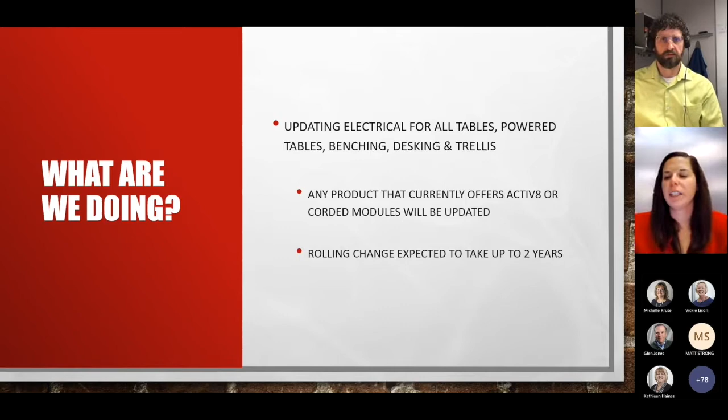So what are we doing? We are updating electrical on all tables, powered tables, benching, desking, and trellis. Basically, any product that currently offers our single circuit Activ8 system or corded modules is going to be updated. This is a huge project for us here at KI, as this is a pretty big change for us. So we are going to work as quickly and efficiently as possible, but this will be a rolling change, and it could take up to 2 years to get it complete.

So please, again, remember that we are working as fast as we can, but it will take some patience to get through this process. So why are we doing it? Currently KI owns our own modules, we own PowerUp and Villa, and when technology changes, such as needing to add USB-A or USB-C to modules, it's on us to actually modify those modules to have the most current technology. This is not only time consuming, it's resource intensive, and it has a lot of challenges when we do that.

Our Villa module is the only module we have with USB-A charging, which has become a standard in modules. But we've gotten a lot of feedback that with its location below the edge of the work surface, those large plugs don't fit because they're interfering with the edge of the work surface. PowerUp has the pop-up design, but we tried to get USB-A charging into that module, and it was a pretty big project with a lot of resources required. So it was a challenge for us, and it's difficult because we have our challenges with Villa and plug orientation, and now PowerUp doesn't have USB-A charging.

And we know that USB-C charging is becoming a more common request in the industry, so that would only put us behind on USB-C charging if we got USB-A in. Our Activ8 system has been with KI for quite a few years, and we've had our struggles with that as well. We are getting more and more complaints that we can't use it in places where there's GFCI outlets or backup systems. These are common configurations in floor monuments, as there's new builds with codes that have changed. So we knew that this was going to continue to be a problem going forward.

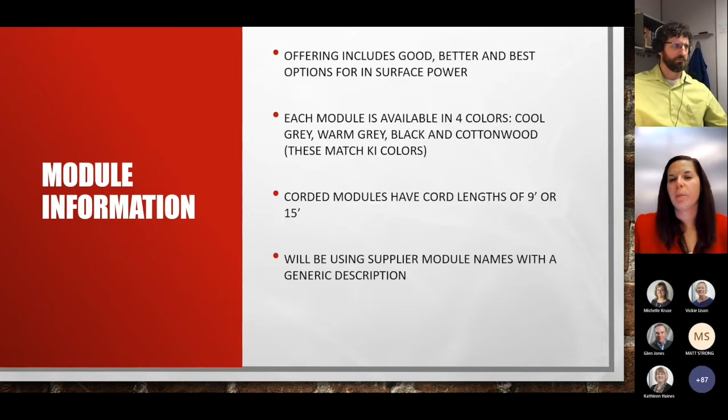Corded modules will have cord lengths of 9 foot and 15 foot. That has not changed from our existing offering. Just so you are all aware, we will be using our supplier module names with a generic description. Some of these module names will sound familiar, or you may have already seen them on other products.

So to start out on the module offering, for in-surface modules, Node in-surface is going to be our good option. This means it's going to be our least expensive module option.

The great thing about this one is it has a round cutout, so if you don't have power and want to add power, it's easy to put that 3-inch round cutout into the work surface after the fact if you don't order it that way from the factory.

This module is configured with 1 power outlet and a USB-A and USB-C charging port. USB-A has been a standard for a while. USB-C is new technology that's coming online. Basically, any new Apple product will have the USB-C cord at this point, so we expect there will be more and more demand going forward for USB-C.

This module is available in either a pattern or a 3-prong plug, and we will talk more about pattern in the future, but that is our single circuit system that we will be adding. Again, this is our entry-level in-surface module with a low price point, and the list price on a corded module is $240.

Our next better option is going to be Dean in-surface, and this we would really consider our Villa replacement. But this module sits flush on the work surface, so we don't have the large plug interference issues that we have with our current Villa module.

It does come with 2 power outlets, a USB-A and a USB-C charging port, and an open data port. When modules are configured with the data port, we automatically include a data tree, just like you're used to with our existing modules, to give you options for HDMI or just putting a cover on it. This module is available with pattern or 3-prong plug and has a medium price point of $322 as a corded module.

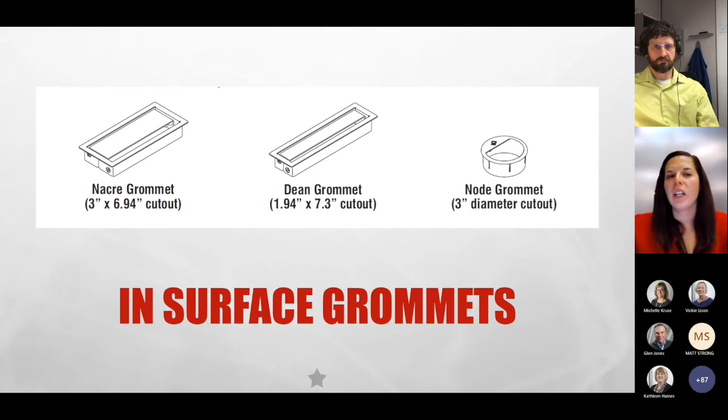So that's an overview of what the module options will be. I had mentioned that we have developed a series of in-surface grommets to support each of these cutouts. You can see the different grommets pictured there. Again, these would be used in wire management situations or if you wanted a placeholder to add the module later.

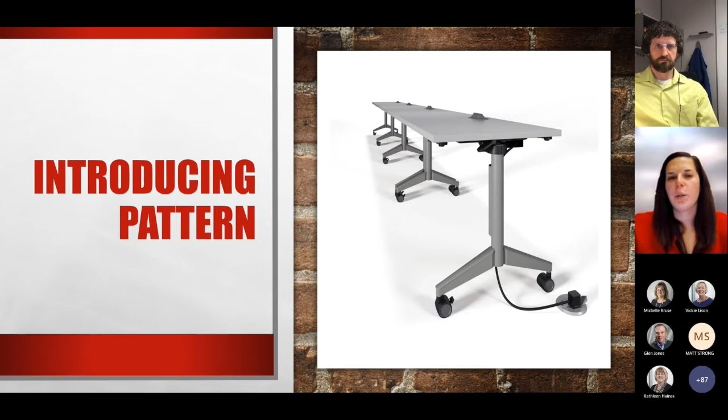So now we are going to talk a little bit about pattern, which is our single circuit system, which will be replacing Activ8 in the long term. And I'm going to show you an animation that shows how everything works together.

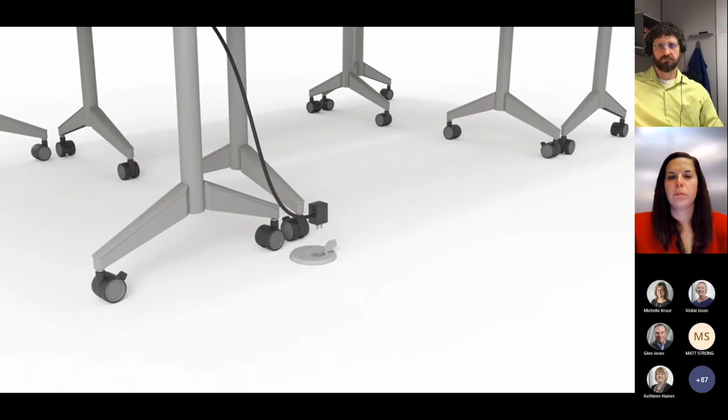So it's that easy. Really, it's going to be similar to our Activ8 solution on Pirouette. However, there are some differences between the two, and that's what we'll spend our time talking about today. So Pattern, it is a modular system. It's considered a branching corded system. It can power up to 20 power units, so it has more capability than our Activ8 system has.

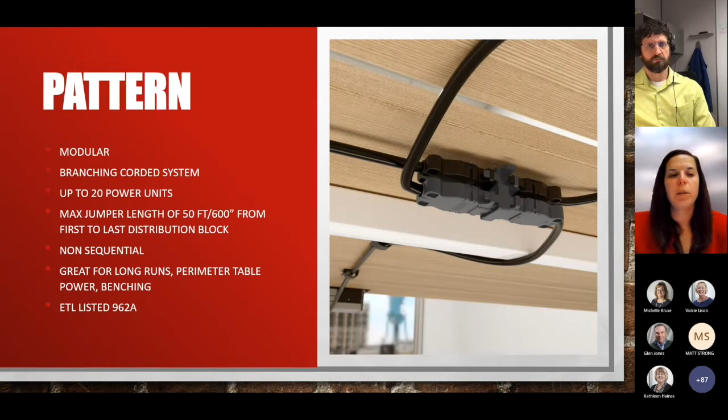It allows for maximum jumper lengths of 50 feet or 600 inches from the first to last distribution block. So again, more capability. It's non-sequential. It's great for long runs, perimeter tables, as well as benching. And it is ETL listed. So ETL listing is considered equal to UL listing. It's important to know that this is listed to the same standard as our existing system.

So talking about pattern maximums, there are several things that go into determining what the maximum is when you are planning with pattern.

The first and most important is that it's a 15 amp system with 12 amps sustained. This is the same as Activ8, where you can only pull so much power from the system. So regardless of how many modules you have plugged in, you need to make sure your usage is supported within that 12 amps. Up to 20 power modules, and this is best case scenario. A lot of times our planning won't allow for that, but it does prove this system is more capable than Activ8. Or 10 distribution blocks, which we'll talk more about in the next couple slides.

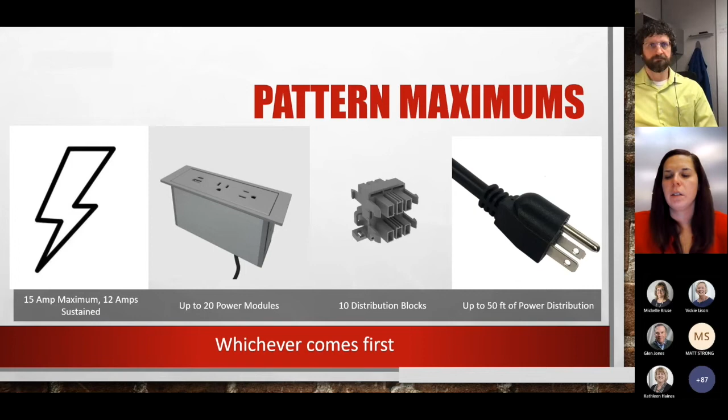And then up to 50 feet of jumpers per in-feed. As I had mentioned, Pattern is a single circuit plug-and-play system similar to Activ8. However, it does plan differently.

One of the biggest differences is that it uses distribution blocks. If you're familiar with Activ8, it had a plug on the end of each module that would allow you to connect jumpers to it and connect them together. This is a similar concept. However, it's a standalone block that would be separate from the cord.

We have made this as easy as possible to order so there's no confusion, as we have included these in the jumper kits and the in-feed kits, so you don't need to order them separately. There are 2 distribution blocks: one is the white in-feed distribution block, and that is different from the gray jumper distribution block. So when you order an in-feed kit, you will automatically get the white in-feed distribution block and a gray jumper distribution block. And when you order a jumper kit, you automatically get the gray jumper distribution block.

A lot of these images you're going to see in this presentation going forward are directly out of the Pirouette planning guide, so we have made that as extensive as possible. You don't need to worry about taking notes on exactly the differences, you will have resources to go back to.

The white in-feed distribution block allows you to do the in-feed in and then 2 jumpers out, as well as power 1 power module. Why is this important? This allows us to put that in-feed anywhere in the run. You can put the in-feed in the middle of the run, the end of the run, or wherever you would like, and this is a very important piece to that. And then the gray jumper distribution block would allow for jumper or in-feed in, and then jumper out, and then powers 2 power modules. So basically this is a pass-through block that allows you to connect from table.

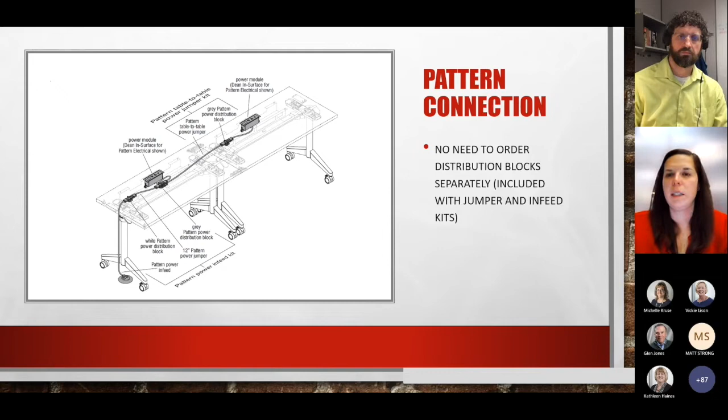So a pattern worth repeating. Why is it called Pattern? Because it's easy to just plug things together. That top diagram shows you the in-feed kit on the end, so a maximum length run for that would be 50 feet. But in the middle, you see that the in-feed is in the middle of the run. Now you can go 50 feet in each direction.

This is significantly more distance than we can get currently with Activ8. This is great if you're using tables on the perimeter and you need to go longer runs. And then the bottom is just an example of, if you don't need to go 50 feet each direction, obviously you cannot exceed 50 feet in any direction. So those are kind of the distances we need to remember.

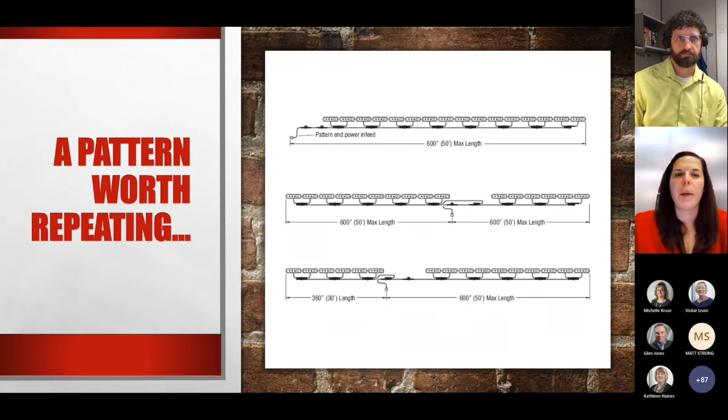So comparing Activ8 to Pattern, what does it look like? The number of modules per in-feed on Activ8, maximum is 8, Pattern is 20. The maximum length of run with Activ8 is 40 feet, where Pattern is 50 feet, or 100 if you're using that in-feed in the middle. The placement of the in-feed, it can go anywhere in the run, so middle, end, 3/4 of the way through, all of them are options.

The module offering is very limited with Activ8 because it's required that we use Power Up or Villa, and then we have our under-table power, which is the RPTs.

With Pattern, we have standardized on the select modules that we reviewed earlier. However, we do have access to a slew of other modules through our supplier, which are compatible with Pattern. So it gives us more flexibility, as well as the modular design in the modules allows us to really customize through modified products if needed.

We talked about Activ8 being incompatible with GFCI outlets and that being an issue. We have made sure that our system going forward is compatible. So Pattern is compatible. And again, Activ8 is UL listed, Pattern is ETL listed, but they are considered equal.

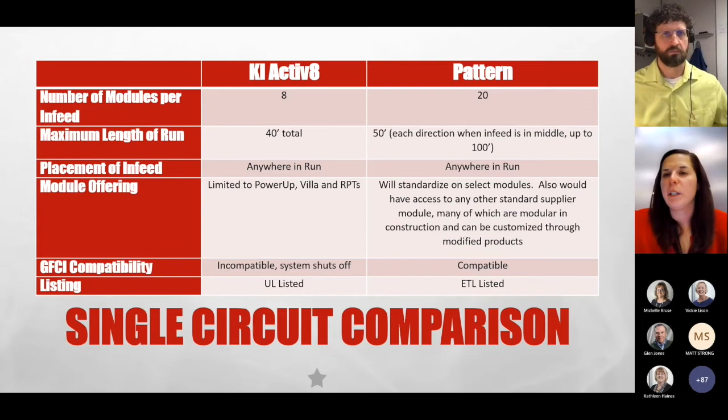So if you look at just the number of modules as well as the length of run, and then also our module offering, which is really important to our clients, you can see that with Pattern, we have a much more capable system than we currently offer.

So planning rules for Pattern on Pirouette. In general, Pattern will plan like Activ8 does on Pirouette. So if you're familiar with Pirouette, there are Activ8 specific models, or in this case, we've now renamed them as single circuit specific models.

And you would go to that section in the price list, and then your power pick gives you the options for Activ8 and now Pattern. So it's all in one list so that you can easily compare the options.

Single circuit models always have and still will include a trough, Velcro wire managers, all table components for that power pick. So that includes the modules.

And any in-table jumpers. If you have more than 2 modules per table, you would need an in-table jumper, and then distribution blocks and gangers.

We'll talk a little bit about the snap-in modules in a little bit, but they will always come with a grommet in the work surface to make sure that we have good cord management with those.

We do have some new options available in our list of offering, which includes the Dean clamp-on and the Dubbel undersurface as standard product options now.

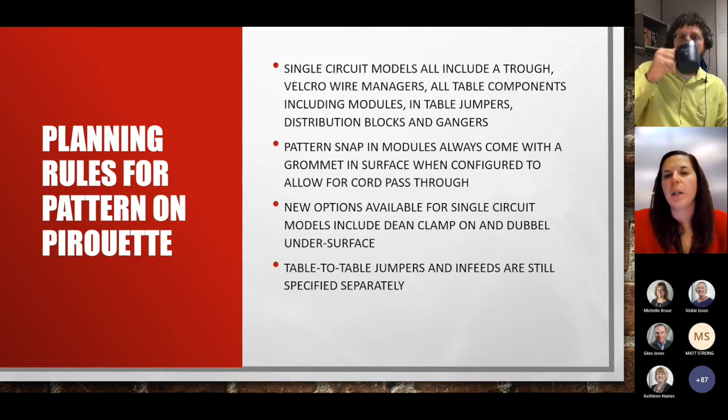Table-to-table jumpers and infeeds are still specified separately. So you order your Pirouette model number, you pick your power pick for whichever module you want or modules, and then you need to order your table-to-table jumpers and your infeeds as separate line items.

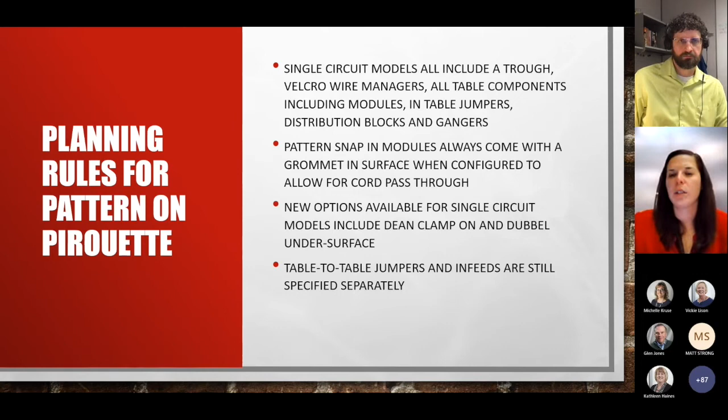And that is because we don't know how you're configuring the room, as well as we don't know your power needs and if one infeed would be enough for 9 tables or not. So those are going to be required to be ordered separately.

So it's a list of standard configurations of power picks on Pirouette that you can see on the screen. There are a lot of options. There are more options than we had before.

We tried to anticipate what options would be needed and make them standard, but not every option is available on every table. So tables with two modules as a standard option would be the 48-inch and wider.

So hopefully that, it looks a little cumbersome when you look at the list, but really you get pretty much half the choices for each table model.

Table-to-table jumpers, as I had mentioned, are specified separately, and we've simplified the lengths of the jumpers. So with Pirouette and Activ8, we had specified the shortest jumper possible for a configuration. The problem is that didn't always support reconfiguring, and that's really one of the great things about this system is...

You put Pirouette on casters and you can easily plug it together, reconfigure, and then plug it all back together again. When you had a jumper that was too short, that wasn't possible.

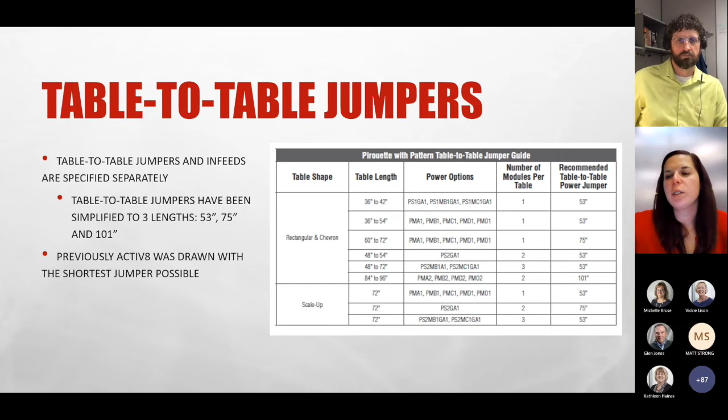So we tried to figure out what would be the worst case scenario for layouts, and then that is the recommended jumper that we are going to be recommending for that size table instead of by layout. This gives us maximum flexibility, but we also made sure that our jumpers were priced accordingly so that they were pretty close in price, so you don't have to worry so much about the budget in doing it this way.

So Pirouette and Computer Labs. I see a lot of pictures, or I get a lot of questions on using Pirouette and Computer Labs, and I take that as a compliment that we're wanting to use Pirouette in that situation. I think it's great that it works that way, and we have developed robust enough wire management to support that.

However, when we thought through how we were actually going to be routing cords and plugging things in, the previous trough design had some flaws when it came to Computer Labs.

So we redesigned it to make it a better solution. The snap-in RPT modules, which I'll show you a close-up of in the next slide, moved to the user side. Anytime you specify a table with under-table power, it will automatically come with a grommet in the surface, so you can take the cords from the monitors on the table and route those cords through the grommet into the trough and plug them in there. It's a much cleaner design than before, where cords would hang over the back of the table. We also included cord pass-throughs on the upper non-user side of the trough so you can put plugs through there if you don't want to run it through a grommet. So lots of options to make this clean, and a nice improvement for us.

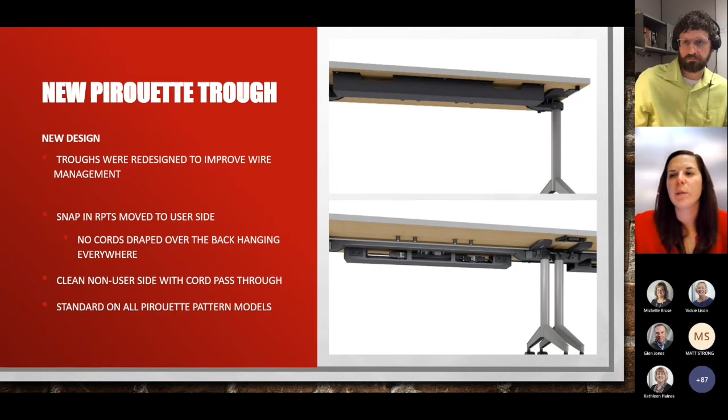So any table you order with Pattern models, or any Pattern model you order on Pirouette, will include this design trough. The price list has also been updated in the accessories section to reflect this style trough. There's a little overlap between Activ8 and Pattern, and Activ8 models will continue to come with the previous trough design. The snap-in RPT, which I've talked about briefly a couple times, is our new under-table power module. It's replacing our RPT. It just snaps into the trough and has 2 power outlets. It's available with Pattern only, but it's a low price point way to add more power to a table.

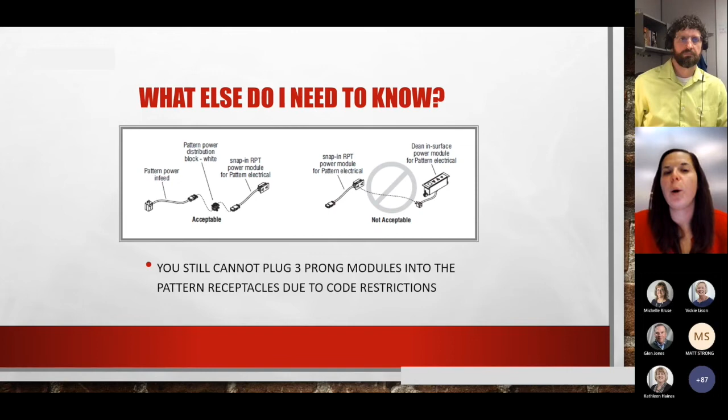What else do you need to know? You still cannot plug 3-prong modules into Pattern receptacles due to code restrictions. So if you order a Pirouette table with those snap-in RPT under-table power modules, you can't put a Dean clamp on the back edge and power it through the snap-in RPT. You would need to use Pattern components to do that. That is a code requirement.

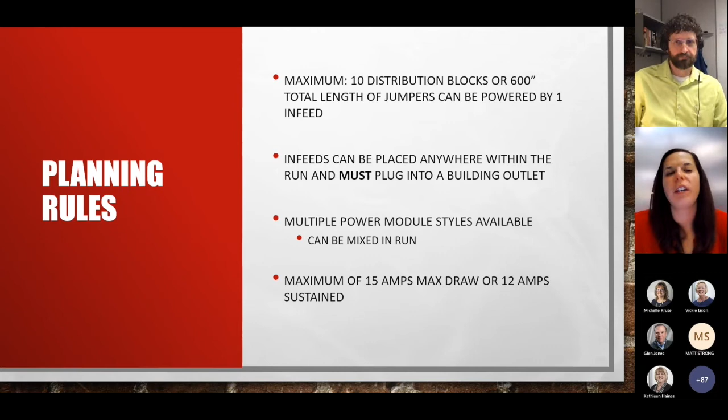Planning rules: maximum is 10 distribution blocks. We automatically use 2 distribution blocks with the in-feed kit, so we can use up to 8 more in our run. The total length of jumpers that can be powered by one in-feed is 600 inches, or 600 inches each direction if it's in the middle. The in-feed can be placed anywhere within the run and must be plugged into a building outlet. Multiple power module styles are available and can be mixed within the run. It's still a 15 amp system, so that's the max draw. They don't recommend pulling 15 amps for more than 3 hours, so plan toward 12 amps sustained. We have tools for that as well.

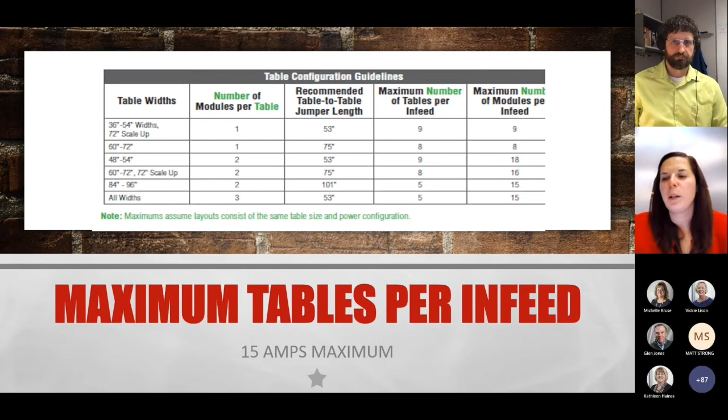So what does that look like when you look at the power options on Pirouette? You have an option of 1, 2, or 3 modules based on the table size and configuration. If we look at the maximum number of tables per in-feed, it's a maximum of 9 in some cases and 5 in others. The maximum number of modules, if you had 9 tables with 2 modules each, would be 18. So the system maximums don't always correlate to our table options. This chart is in the planning guide, as well as planned into CAD.

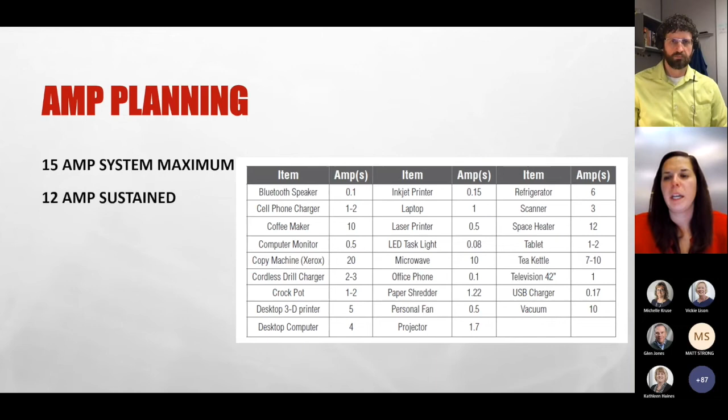But again, it is a 15 amp system, so what does that mean? We have an amp planning chart in our planning guide that gives rough numbers on what you can expect. A computer monitor is half an amp, and a laptop is an amp. So you're really trying to anticipate what's going to be plugged into the system and how often. If you're planning a computer lab, it's pretty easy to estimate how many desktops and monitors will be plugged in. If it's a training room, it's harder to anticipate. Are you charging your cell phone and laptop, or not charging anything? So it's about understanding how the user uses the space and anticipating their needs.

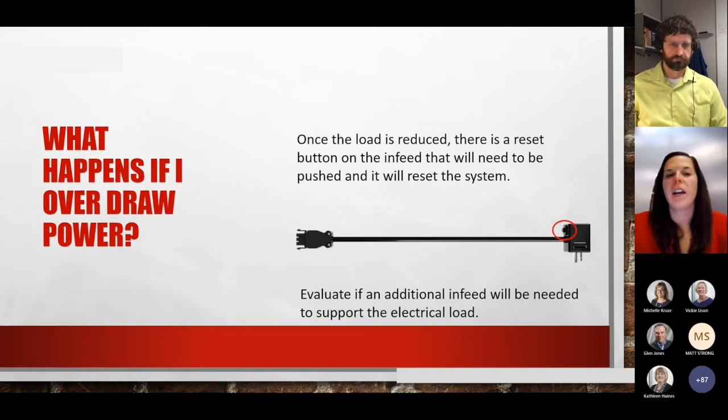So if you overdraw on power, what happens? Once you reduce the load, unplug some things or turn them off, there is a reset button located on the in-feed that can be pushed to reset the system. I recommend that if you find yourself in this situation, you evaluate your needs and see if it's worth adding an additional in-feed, so you don't continually have this problem going forward. So again, the maximums: 10 distribution blocks, 20 modules, 50 feet in either direction, so up to 100 feet, 15 amps or 12 amps sustained.

I have sent, or will be sending, a sample kit to each district, as well as some for corporate employees, so you can get your hands on each of the module options and see them represented in each of the standard colors. Those kits will likely go out by the end of November, so keep an eye out for them. We're including all of the modules, as well as an in-feed kit, which includes an example of a jumper and both distribution blocks.

We are also sending two Nacre modules, one corded and one patterned, so you can easily show your clients the difference between the two.

Additional information: we're planning a 6-month period from launch where Activ8 and Pattern would both be available, until Activ8 is no longer standard. We're encouraging you to encourage your clients to transition sooner rather than later, as Activ8 is not a long-term solution for KI at this point. We understand it will take time to get them comfortable with the solution, or to find the right time to switch based on where the product is going, but the sooner the better.

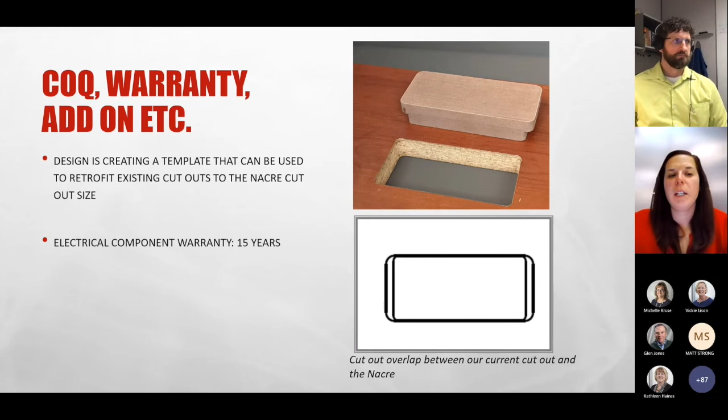As a reminder, all of our electrical components have a 15-year warranty.

Modified products: typically our policy is no modified products for 6 months, but we're really trying to be flexible on this one, knowing we're in a transition period, and knowing electrical is something we do a lot of currently through modified products, and it's a little easier to manage than a KI manufactured product. So our modified products team will entertain PMRs for new electrical and existing products outside of Pirouette, as long as it's using current parts.

That means any of the corded modules can easily be put into any of our other table lines that haven't transitioned yet, as well as if you're looking to do pattern, you should be able to do it with our existing parts without a problem, based on the jumper lengths we're offering. So it gives us a lot of flexibility in this transition period to make sure our clients are happy with a consistent solution, even if it's not standard yet.

So we have a slew of resources available. I showed you the pattern animation that will be available for your use — you can share that with clients. We'll also have cut sheets for pattern and the modules, which will be available next week with launch.

The price list has been updated. Product specifications have been updated. We really revamped the planning guide — it's now all-inclusive of different base designs and about 60 pages. It's a great resource for a lot of the images I shared with you today that you can reference back to. We also have a KI Power Solutions selection manual for tables.